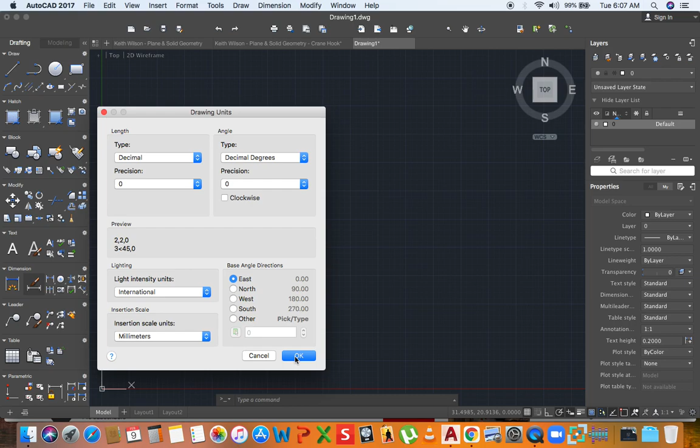As usual, we are going to set up our units. This time around, I'll put the precision to 0. If needs be, it can be changed later. After doing that, I'm going to set my limits to give myself enough drawing space. I'll leave the lower left hand corner to 0, and the upper right hand corner I'll put around this, and the drawing size I can have it 3000 by 3000. If needs be, I can change that later.

Before drawing as well, I'm going to set up some new layers: my outline layer, center line layer, hidden line, dimension line.

For the outline layer, I want a thicker line width, a line thickness. For the hidden line, I would want the actual hidden line, so select that. For the center line, I'd want an actual center line.

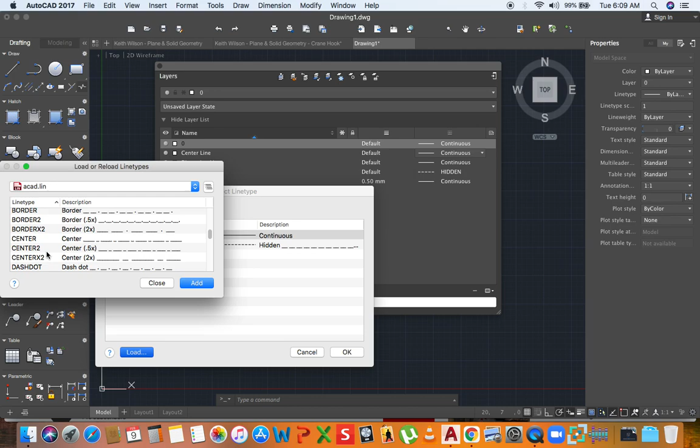As it relates to the color, I'll... for the hidden line, I'll also change the line thickness. I might have to do some adjustments later, but for now, this can stay.

Now to the drawing. I'm going to start using my outline, and I'm going to select the line command. Before that, I'm also going to ensure that my angle is at 30.

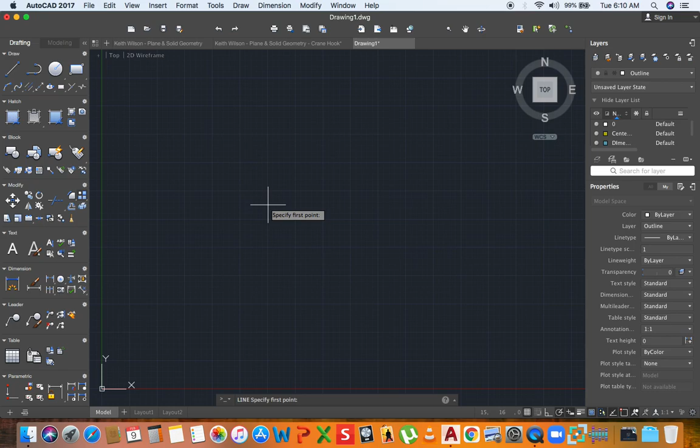Zoom out a bit. I'm going to draw a line. Ensure that my line weight is on. I'm going to draw a line 64 millimeters in length. I can move this line out of the way here.

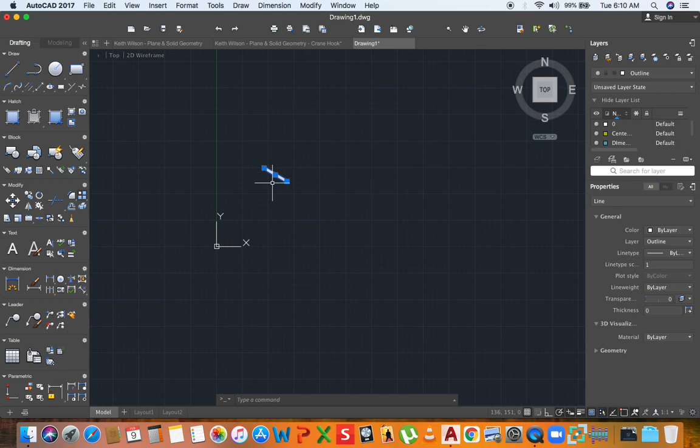Now, if we look at the drawing, this length of the straight portion is 64. However, there's a curved portion at the end forming a semicircle, so that radius should be added to achieve the overall length of the drawing.

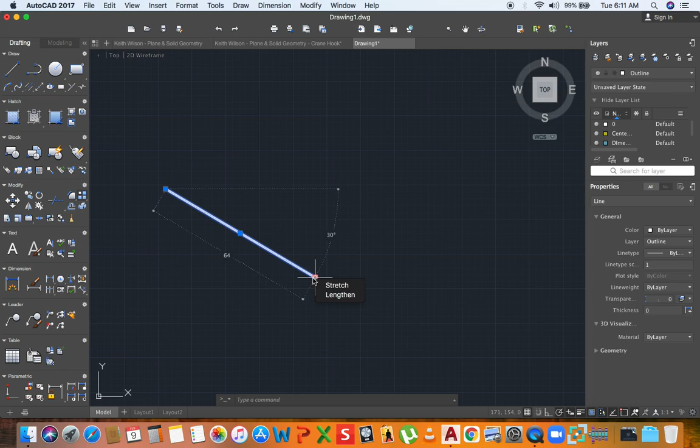So therefore, I'm going to extend the line by 16. Now the line is 80 millimeters. And since the radius of that curve portion is 16, I know that the diameter will be 32. So I know that the overall width of the drawing is 32.

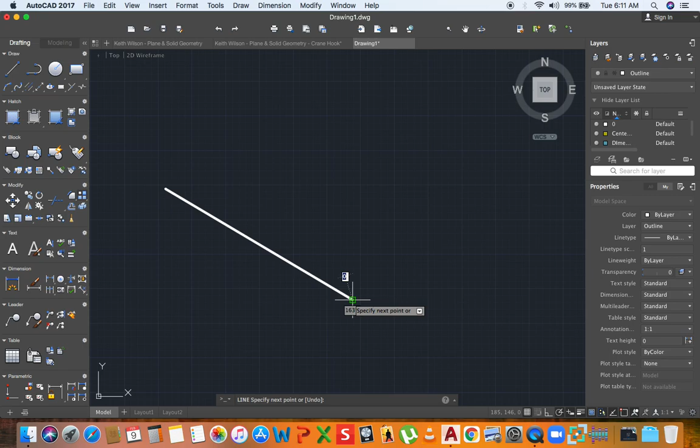And the thickness of that portion that is extended forward is 8, so I'm going to put the 8. Alright, so I'm going to do 32 across, 32 across. Alright, so I'm going to also bring this back 80. I have some trimming to do later.

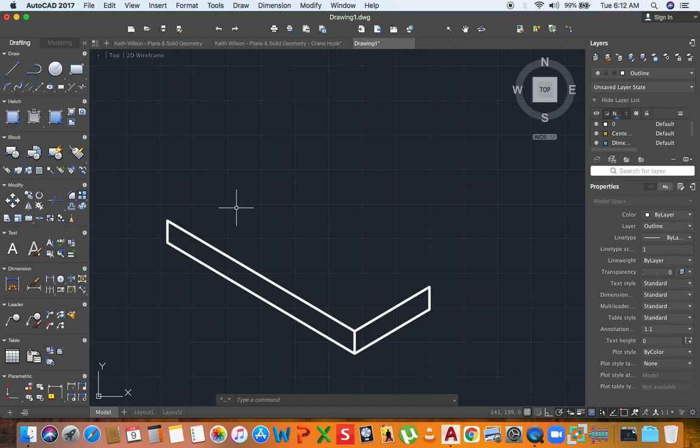Now, a portion at the back, if you look carefully, there's a portion going up like this. This would continue upwards. We don't know the distance from here to here. It is not indicated on the drawing. However, we can attain it.

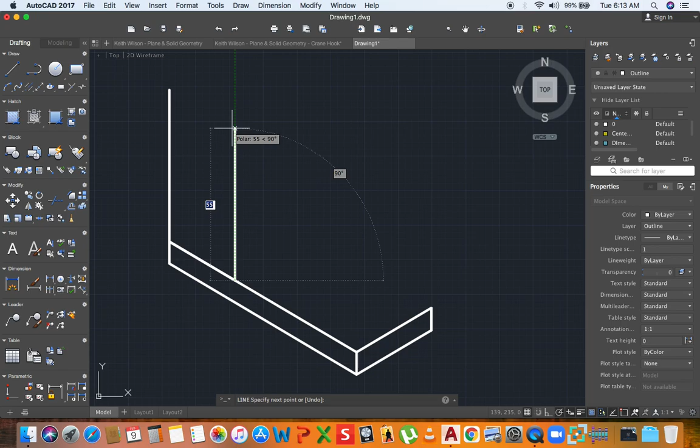So I'm just going to pull this back 28, then bring up the line. There are a number of ways you could do this. You can also draw a line 28, but you would have to know that you'd have to delete the line afterwards. So let's do it the first way.

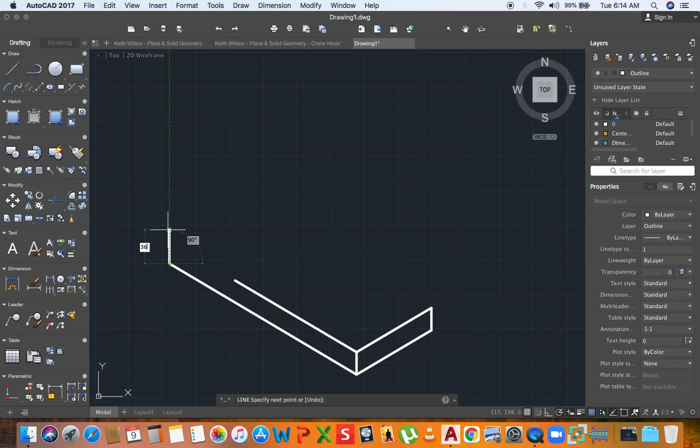I'm going to pull back this line by 28, and this line I'm going to delete it, and redraw it to the correct length that I'm seeing here, which is 36. After I've done that, I'm going to ensure that it meets the line here. So after bringing this up 36, I'm going to bring a line forward.

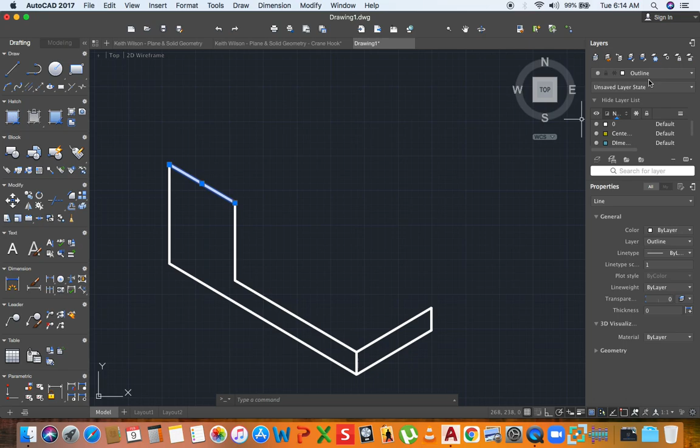This line should actually be a center line, so I'm going to ensure that I change it to a center line. And if you notice, my center line is showing a bit small.

There are two options that you can use to change it. You can right click, go on properties. The properties of this line is being shown over here for me, but you can right click and go to properties, and you can change the line type scale to a greater scale. But once you're doing this, you'd have to do it for every center line that you're working with.

So rather than doing that, I'm going to change the scale down here. I'm going to try 1 into 10. After changing the scale, you have to regenerate the model, so you have to type the command regen. Now it's showing, I think it's a bit too big, so I'm going to use 5 as my scale. Once more, type regen, and then I think it is good enough to where I would want.

Now, if you know this, you realize that once you're drawing a center line to show the center of a circle, you have to draw one in the opposite direction. So I like to pull the line directly up to the center, so they meet like this.

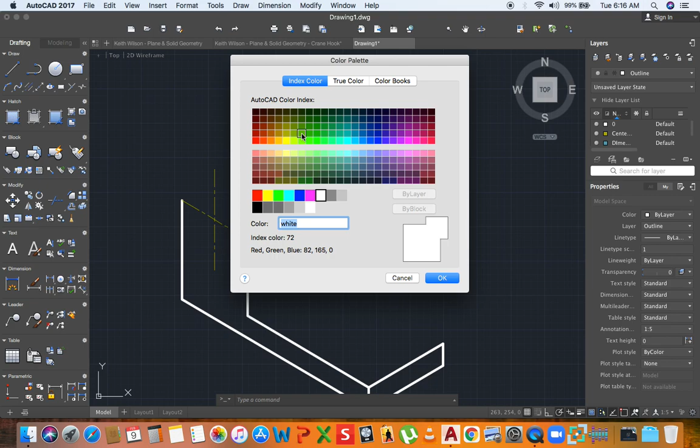Alright, so we know that the radius of this circle is 14, the diameter is 28. So I'm going to use my construction line, the zero layer. I'm going to change the color of this, let's use this color.

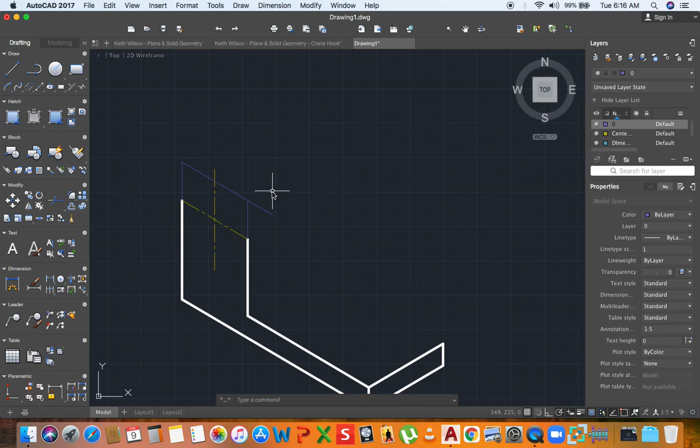So I am going to extend this 14, bring it across, extend 14, and you can trim. I'm also going to extend the line down to 14.

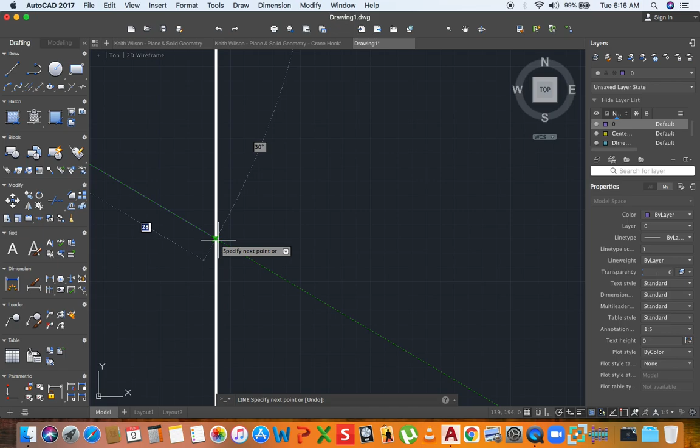Please ensure that it goes right through, or if you're stopping it, do not stop it. Stop it where the X is. If you're not finding the X, just go right through and then trim.

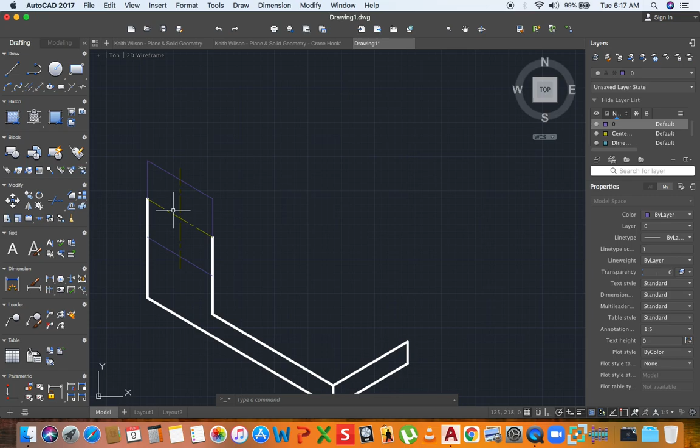So now that you have gotten your isometric box, you can now proceed to draw the isometric circle in the isometric box. So let's do that.

Using the same construction line, I'm going to create what I would call the A pattern, and I'll connect the longer diagonals. So there you have the A. Now I am going to select my outline again.

I'm going to draw a semicircle here and a semicircle here. Now this is how I'll do it. I'll select my arc command. Once I've selected my arc command,

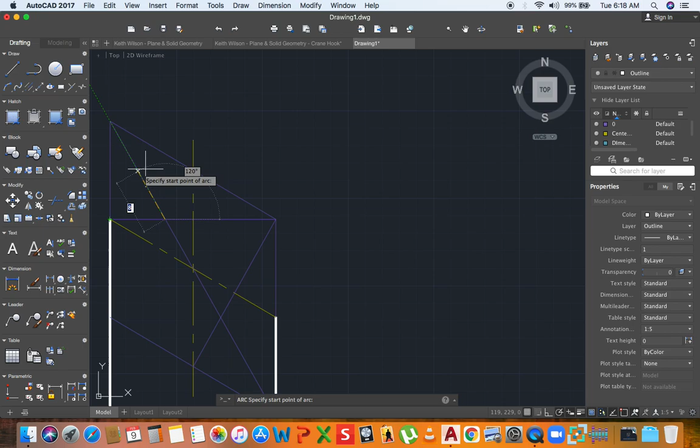I am going to read the command line. It's telling me to specify the start point, but I want to specify the center first. So I'm going to press C, then enter. Then I specify the center. Then the start point of the arc I can choose here or here, but it normally operates anti-clockwise, so I'm

going to select this point first and then swing the arc to the next point. Then I select that point. Now I've used this point to get this arc. Now for this arc, I'll have to use this point.

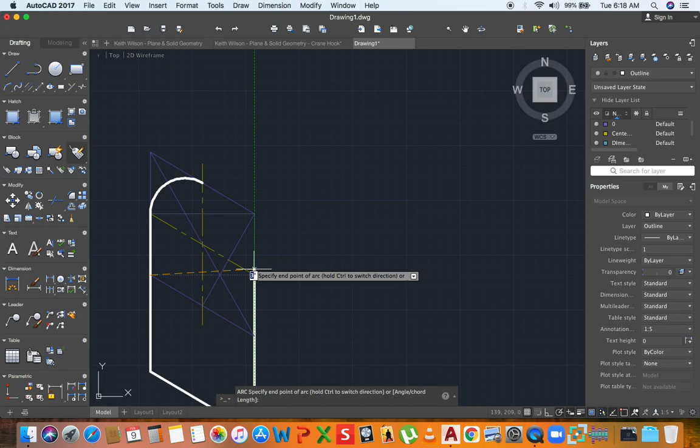So I'm going to select arc once more, then press C for center, then press enter. Then I'm going to select the point here, then the starting point here, or to go anti-clockwise to meet here. Now there you have the arc.

Right? This line now will go the full width of the drawing, 32 millimeters, and it will connect here.

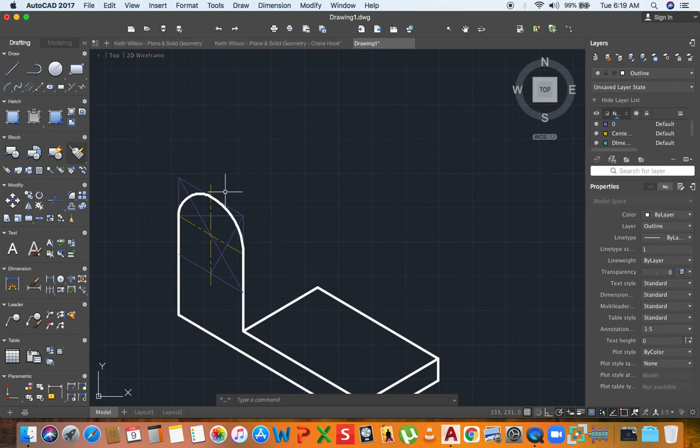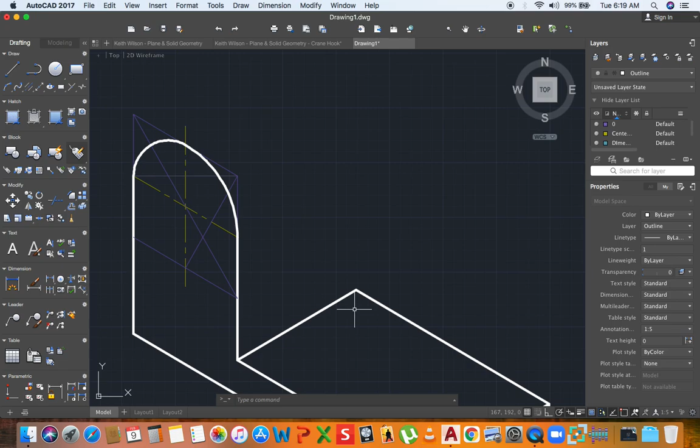Now this is where AutoCAD makes life more easy or easier. If you notice, there's a space between the portion here and the portion that would be over here. The space is 16. And since the overall length is 32, or width is 32, the space is 16, that leaves a measurement of 16. So half would be taken up by this side and another half will be taken up by this side. So you'll have 8, the space, which is 16, and another 8.

All of that will give you 32. So I'm going to take this portion and I'm going to copy it. So I'm going to select these 3 lines.

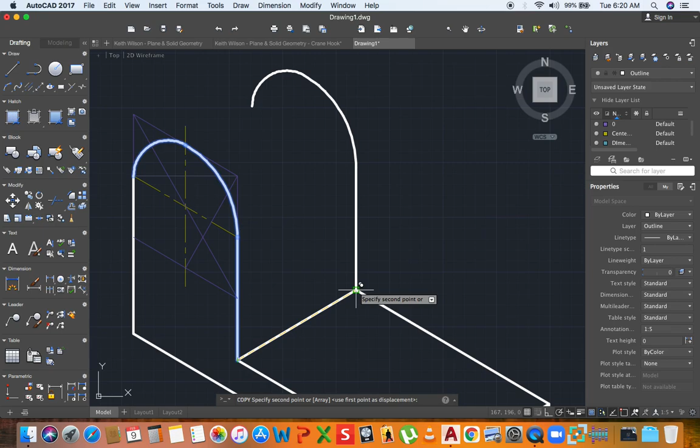I'm going to select copy. Then I select the base point, which is here. Then I'm going to pull it across to the end, like this.

Then I'm going to go back to my outline. Then select this point and allow it to meet up with that point, which is the center of this arc. Now we have to trim the portion that will not be shown, which is this portion.

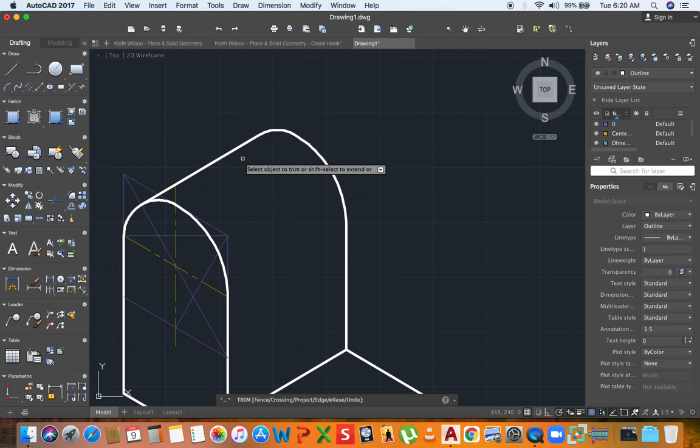Now I'm going to do 2 more copies. I'm going to copy this arc once more, or these 3 lines once more, but I'm going to copy it using the same base point, but copy it at a distance of 8. I'm still going to zoom in and delete this portion.

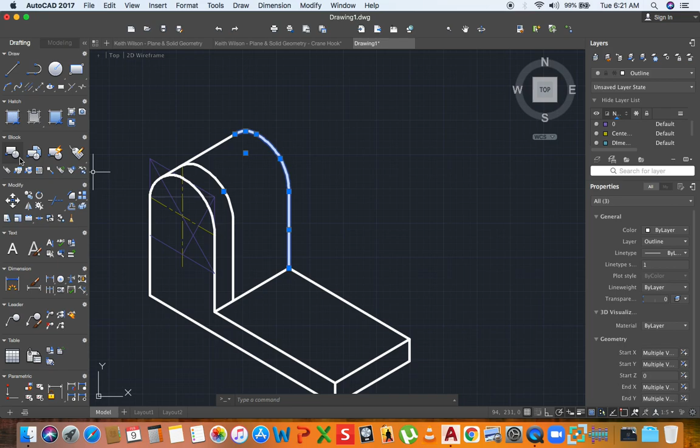I'm also going to take these 3 sets of lines and arcs and copy once more, but from this base point right here. I'm going to pull to the opposite direction. Now I'm going to type 8 just the same.

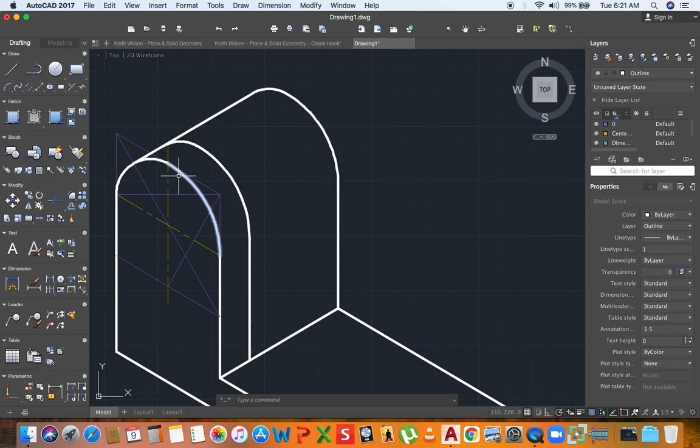Alright, so this is what I should have done. So let me delete this. I should have copied this one. So I'm going to copy at this base point.

So I think the measurement that I should use is 24, 8 plus the 16. The reason being, I need this curve to be, this arc should remain. So I'm going to trim what I don't need.

And there should be a line coming down here. You will see past this arc here. So this is what you will have. You could have just drawn this portion only.

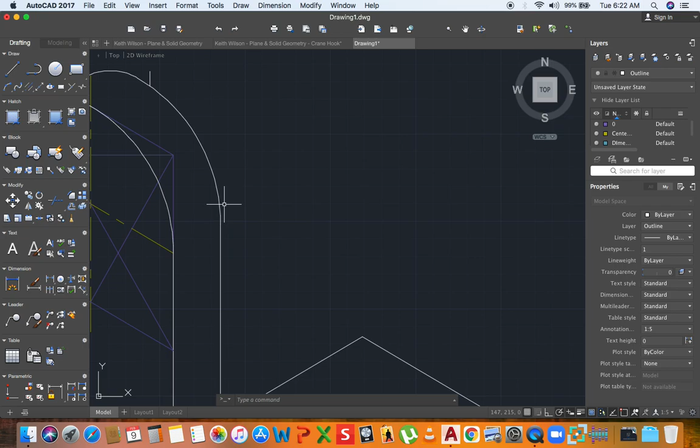So let me show you how this would happen. You would have copied these 3 arcs, copy, type 8, then you would just connect the top of the arcs from this point, then you delete or trim

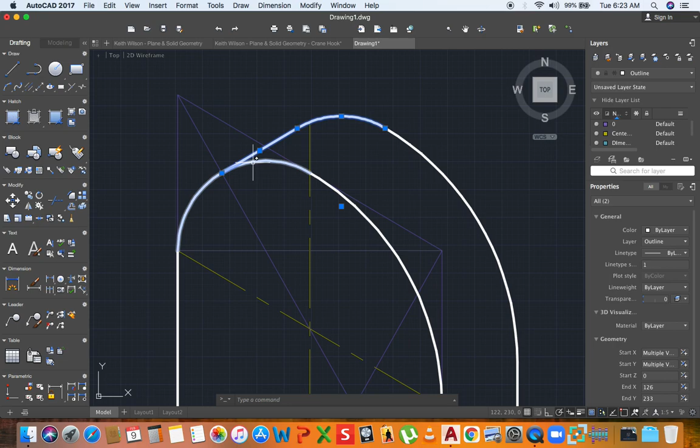this portion, then you select all these arcs, then you would have just copied from this base point all over to here. All you would have to do now is trim this line. So go to your trim command, you trim this line.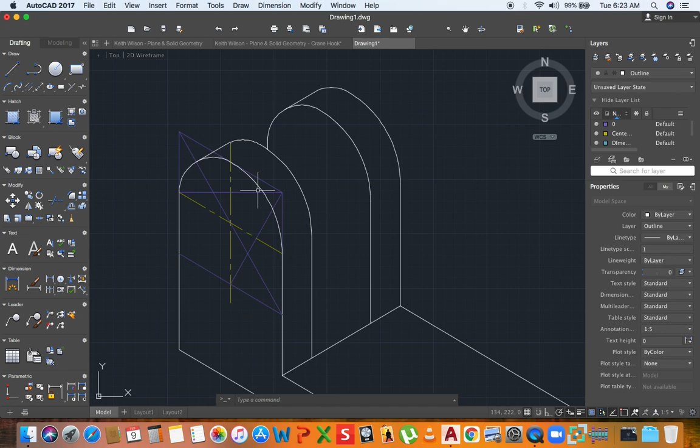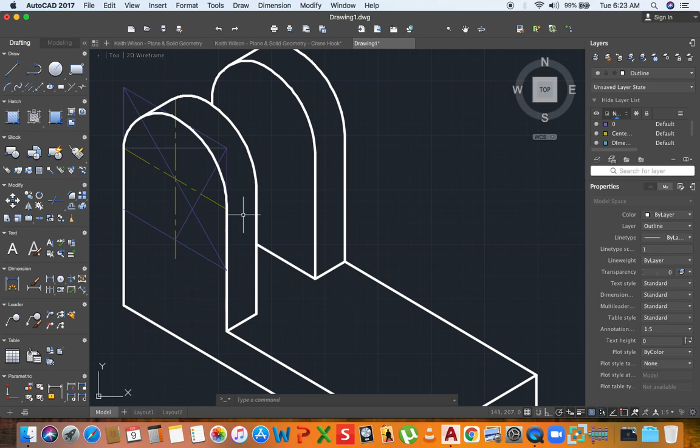Now for this front portion, you will establish your center line. So I'm going to select the center line.

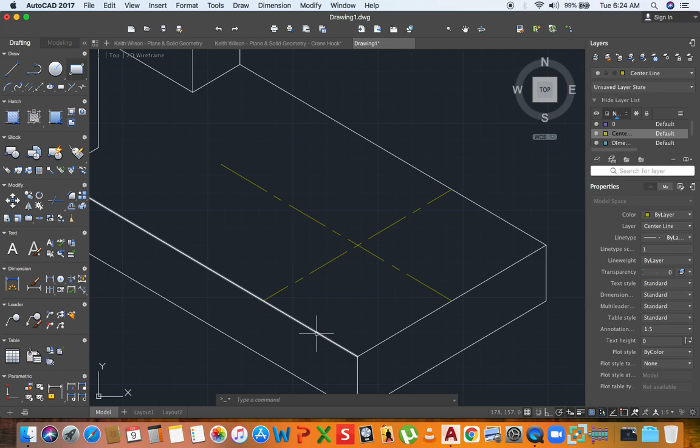Once I've done this, I'm going to find the center in the other direction. I should draw this up by 16, pull this across, and delete this first line since I don't need it. The new line should be here - this is 16. So I need another line that is also 16. I'm going to draw a line from here to here, 16, then bring it across, then delete this first line that I've drawn. You can trim the center line here if you wish.

Now, this is your isometric square again. You're going to go ahead and draw your A pattern once more. By now you should all know how to draw this.

Then I'm going to need 2 arcs once more - this arc and this arc. So like the last time, I'm going to select arc, press C, enter, then select the center and swing anti-clockwise. I've used the incorrect layer to do so, so I'm going to transfer that to the correct layer. All I did was select the arc, go into the layers tab, select outline, then press escape. It will go back to the layer I was using, so I'm going to switch it to outline - that's the layer I want to use.

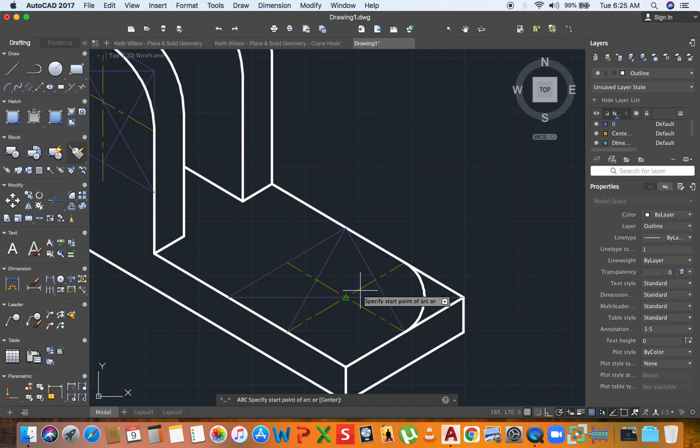Then I am going to select arc once more, press C, enter, select the center point, and swing in an anti-clockwise direction.

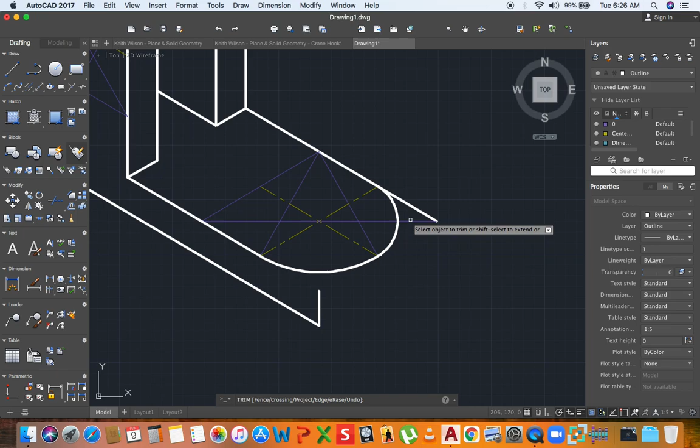Now, if you realize, I really don't need this line anymore, I don't need this line anymore, and I don't need this line anymore. And this line would need to be trimmed. This line would need to be trimmed.

Now, look carefully. I am going to draw a line from this point downwards, and this line will be 8 millimeters. After doing so, I'm going to copy these 2 arcs - select them, press the copy command, and from this point, or any point really, but this point is more convenient, bring this down 8. Since you've drawn the line 8, you just bring it down on the line.

Then we are going to trim some more parts, like for example here, here, and here. Now we cannot trim here, so we just have to delete this line.

Now, in order to show my working or show what happened, I'm going to select my default layer, which is my construction line layer. I'm going to extend this up to this, extend this out 32 for it to meet back here. So you see the box that this was drawn in.

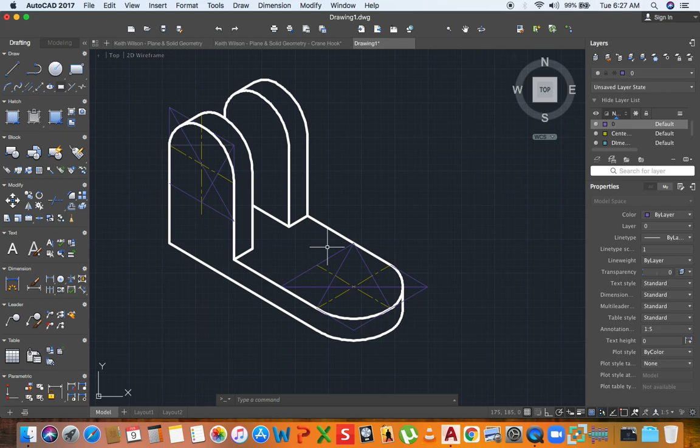Now, for the small circles, let's go ahead and draw the small circles. There is going to be a semicircle here, and there's going to be a semicircle further up. Okay, so let's start here.

If you realize, there's a space of 24 millimeters between the centers of the circles we're supposed to draw. So I'm going to take this line, select copy, select the center, pull it in this direction and type 24, and then extend this line.

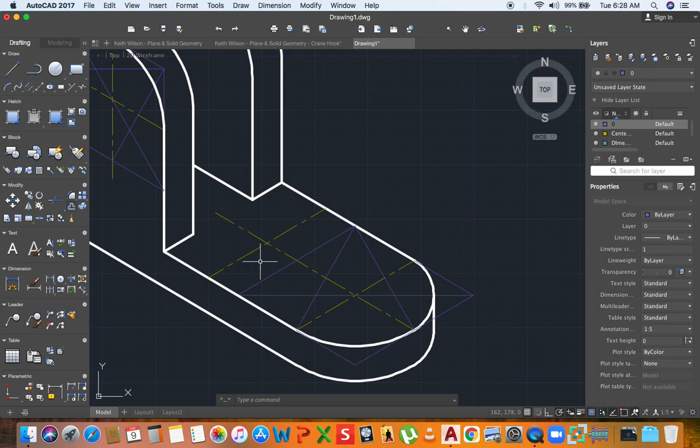Now, in order to not be confused, I'm going to draw the circle here, nothing here - so this is the center. I'm going to select and enter the command on the construction line layer. So from the center, I'm going to go in this direction. The radius is 6, so I'm going to go 6, go across 6, go across 12, 12, 12, then 6 again - or I could just select this line and pull it across. So now we have 12 going around. That's one way to do it.

I could have also done this: copy, 6, copy, 6, and these lines I'm going to type MA for match properties, then press enter, select the source line, and transform these other two lines into that source line. Then you would copy again, 6, copy from this guy, 6 in the other direction. Then you're going to turn these two lines - you can use match properties, or you could just select the lines, then click the layer you want it to be in.

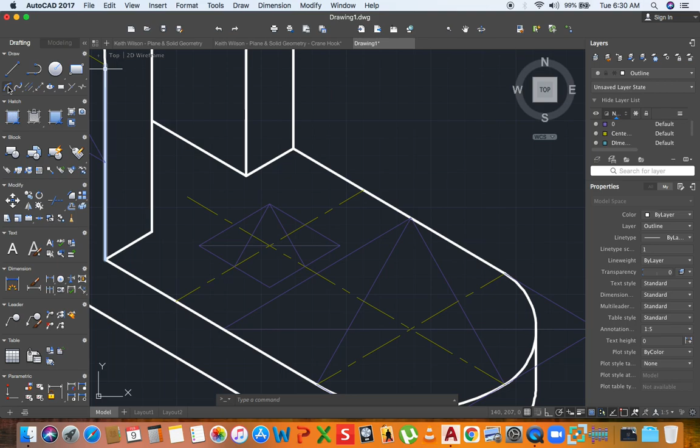Then you're going to draw your arc. Select arc, press center, C, then enter. Then you're going to... oh, I should have used my outline. Now, for the sake of this, I'm going to draw the entire circle, so I'll show you why.

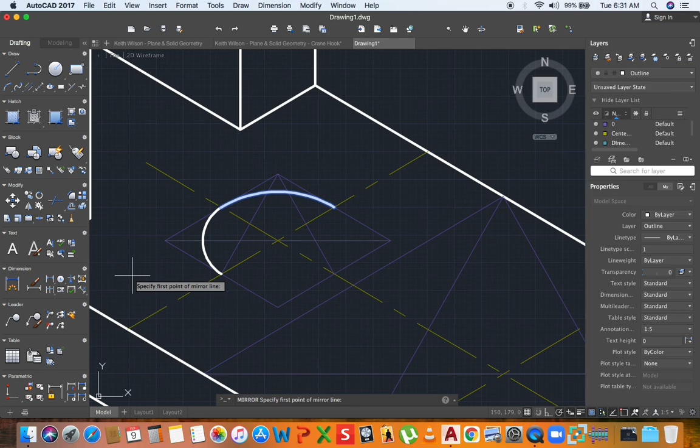Swing, swing, and look at this new trick. Once I have 2, I can select the arc. If you don't know how to do this method, just use how you know to draw everything. Use the method that was taught, but this is a method that can speed the work up. You can just select the arc, select mirror, select the opposite corners, then you have it mirrored.

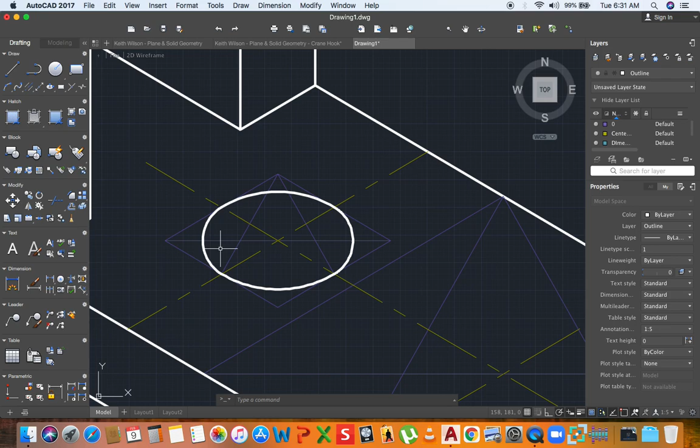Same thing with this circle, or arc rather. Select mirror, select the opposite corners, or the shorter corners that are opposite. Then erase. You normally don't erase the source object because you don't want to erase the arc that is being mirrored. Then you have this.

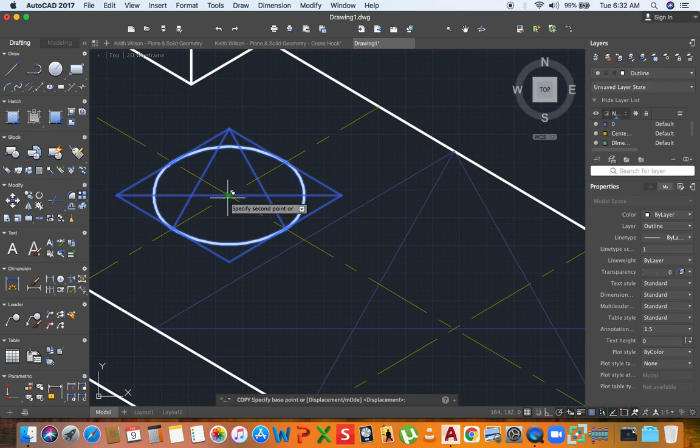If you notice, this is the same circle that is supposed to be here, so I'm going to copy this circle. I'm going to copy everything, even the working out. I'm going to select everything, make sure that everything is being selected, and I'm going to press copy from the center. I'm going to select the center, bring it down to here.

Once I have done this, I don't need this arc, I don't need this arc, delete. I don't need this arc, I don't need this arc. I'm going to delete. Then you're going to draw a line connecting the arcs.

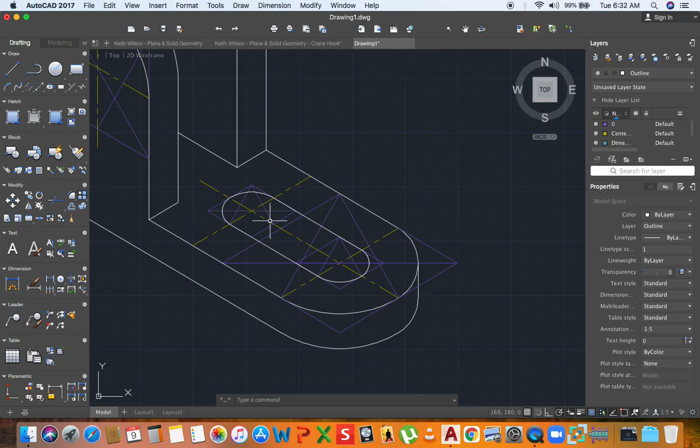Now you're going to select some arcs to copy, because this is a hole, and you can see at the end of the hole. I'm going to copy this arc and this arc. I may need to copy this one, but let's see first.

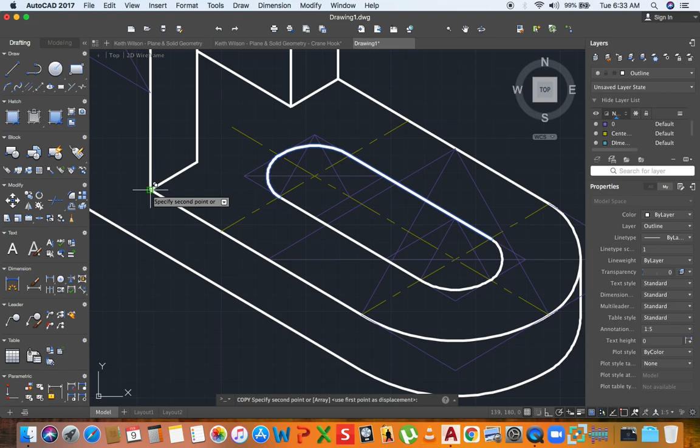Let me select it. You're going to select copy, and you can really select any point as your base point. I'm going to select here for strategic reasons, and I'm going to pull this down 8, and it should be here. You can just type 8, or pull it down to this point where it's intersecting now. Now I realize I didn't need this at all to be copied, so I'm going to delete this.

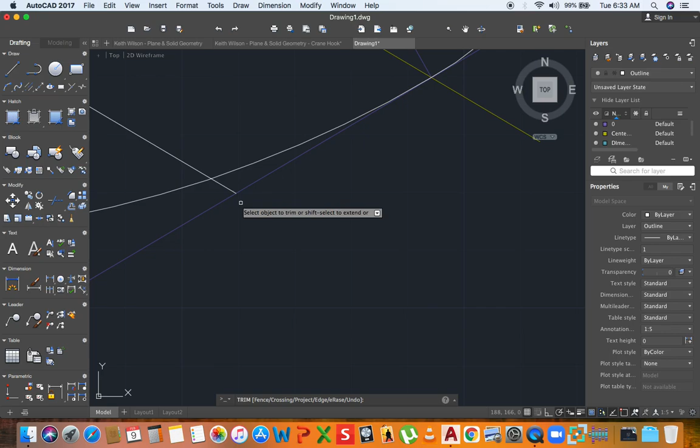I'm going to trim here, and trim here, zoom in, trim here. Now you're seeing the hole. It looks a bit confusing, but if you follow the steps, you'll know how it is derived.

Now I am going to need to draw a circle here. That circle's radius is 20 millimeters, so the diameter rather - the radius is 10 millimeters. So I'm going to need to draw a square that is 10 millimeters. From the center, I'm going to draw a line 10, then from this point now, I'm going to use this point to draw the square.

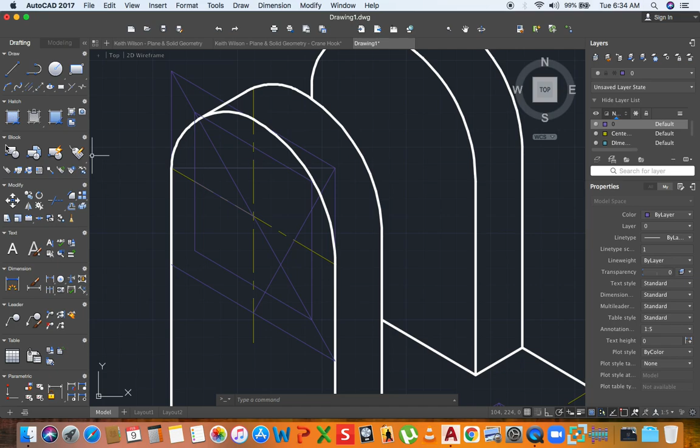So you can go 10, then 20, then 20, then 20, then 10. Or if you want to extend this line to the last point up here, either way works. Now that is your box. You're going to draw your A pattern.

Now this may look a bit confusing, but remember, this is the box that we are working with. So don't let this A pattern confuse you with the one that you're currently drawing. Let me delete this line. So this is the point that you're going to use now. Let me go back to my outline.

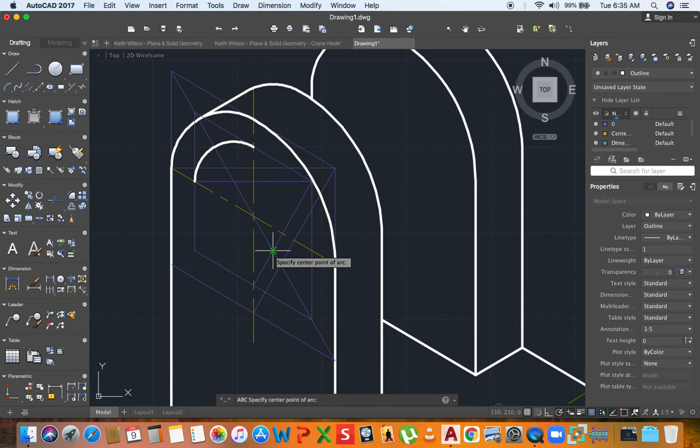Select the arc, press C for center, enter, right here. Then you're going to swing from here to here. Arc again, center, C, enter, this one from here to here. Arc again, C, enter, this one - and you know where to put this, anti-clockwise.

Then arc again, C, enter this point. I'm swinging across. Right, so I have the circle.

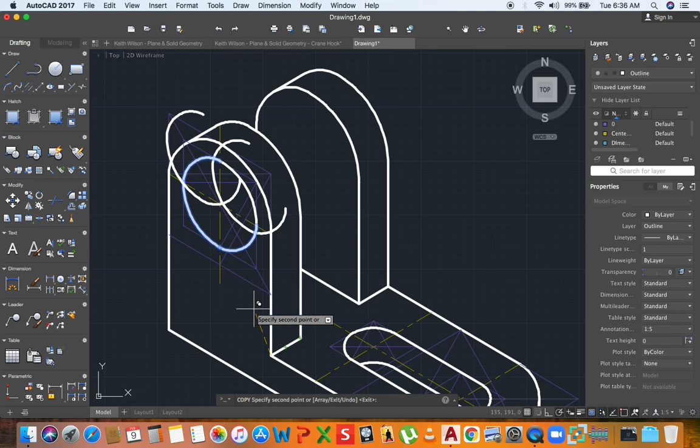Now the easy part. I'm going to select this line, or this arc, and this arc, and I'm going to select copy. I'm going to copy it from here - look at the base point that I'm using, from here to here. I could have just simply typed 8 and pulled it in the direction 30 degrees, but it's good when you have a reference point you can use.

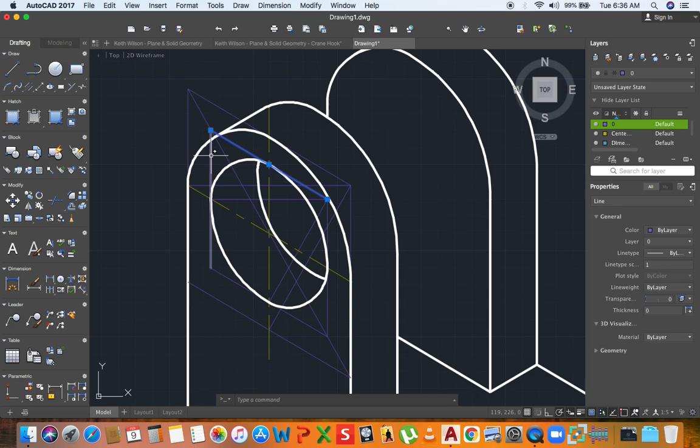And I'm going to trim. The beauty about AutoCAD is you can simply select all the lines that are involved in constructing this circle. Then I'm going to select the arcs that I need copied over - so these 4 arcs plus this, and this.

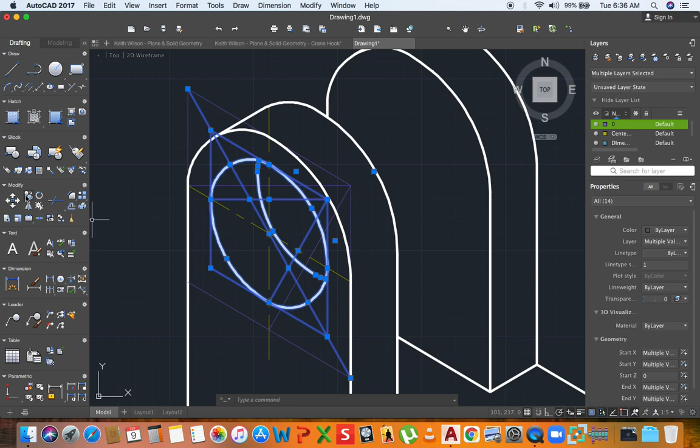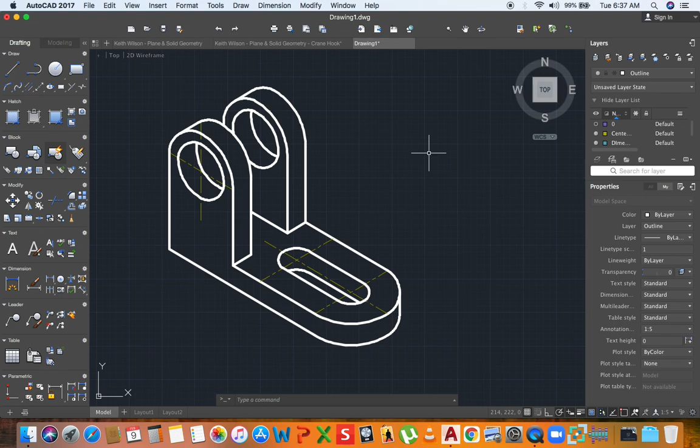Then I'm going to select copy, so this will be my base point, then over to here. Now I know that I need to trim here. The beauty about AutoCAD is you can turn off your construction layer and the join will look like this.

I'm going to also copy the center line, from here to here. So we could go ahead and turn back on my construction line layer, and here you have it - the join.

Alright, I hope you grasp the concept of drawing this, and I hope that you were paying attention to some of the tricks that I was using to attain this drawing. So in the next series I'll move on to the next drawing.